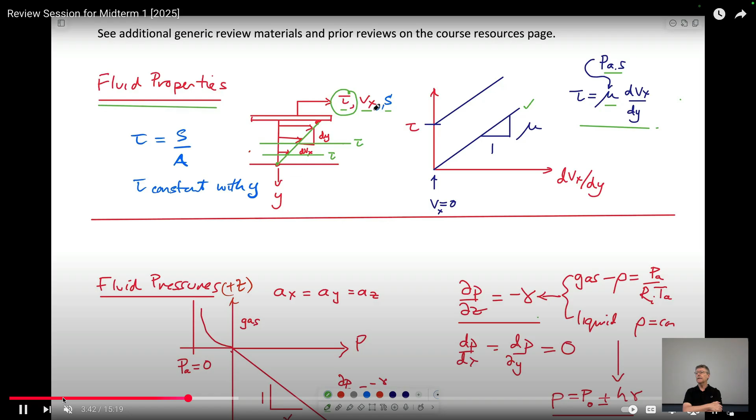So have a look at the stuff. It's not so daunting, it's a chance to show everything you know.

Any other questions? Did anyone get any angst on Sunday morning? No, you're up too late. That's right, that's good. There were night owls up at 2 o'clock in the morning saying, what the hell's this? If we get here earlier, could we start earlier? 7:55, probably.

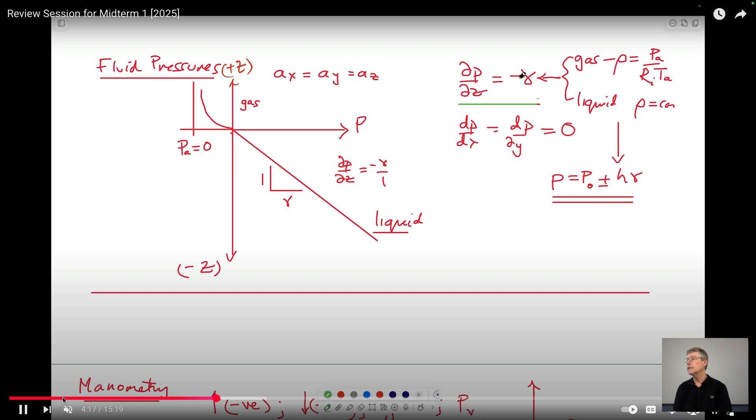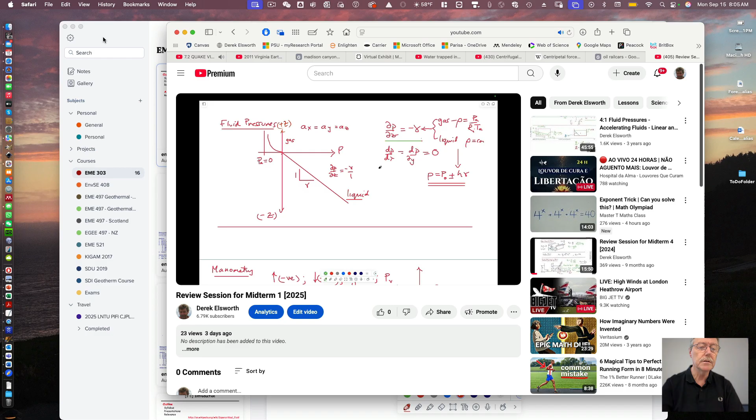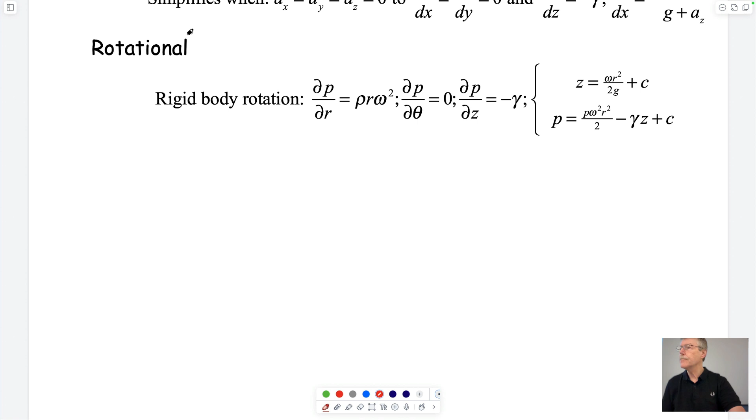So we're talking about this misnomer of accelerating static fluids. If you looked at the material for our Labor Day vacation, the Monday after Labor Day, you'll recognize the following. I'll reiterate just to set the stage. We won't repeat the derivation.

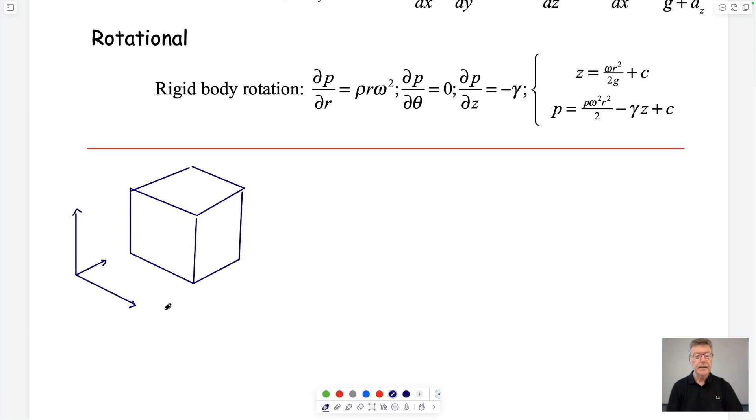We talked about defining the equations of motion, and you'd have seen this little figure before. It all seems a little horrible because it's differential calculus, but actually it's no different to the way we framed it on Friday.

We talk about this right-handed coordinate system, z positive upwards. Lengths of this cube were dx, dz, and dy. We had a weight of this cube equal to mass times gravity, which is the same as volume times density times gravity.

We had pressures acting on the base, and a pressure acting on the top, and that pressure was P plus dP/dz, which we multiplied by dz.

So we resolved this, and we also put on potential accelerations. We could accelerate by some acceleration in the z direction, or by some acceleration in the y direction. Like me scooting across the floor holding one of your beakers of water, it would be exactly that, a bucket accelerating, but one that contains the fluid.

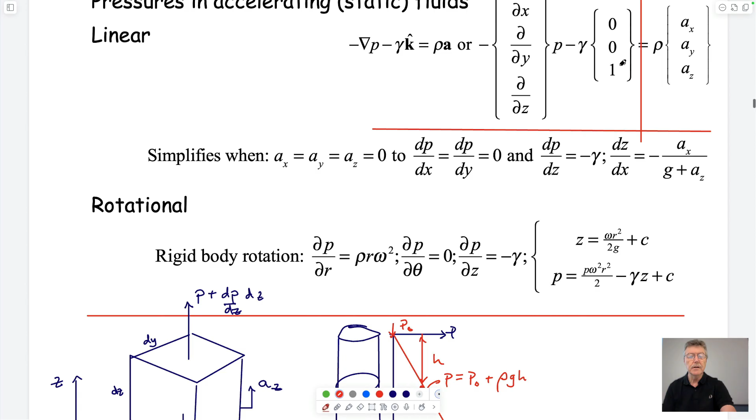There are forces in the x, y, and z directions, which each of these equations represent, which I'll write out in a minute. There's accelerations in each of the x, y, and z directions represented by this. If we divide through by the volume of this thing, equal to dx, dy, dz—the edges of this differential cube—then we can divide both sides by the volume. Mass per unit volume is density, acceleration in x, y, and z is this, and all these other terms are the other forces applied on this differential cube.

And so what we did—don't do this—but we assumed we'd make our life easy in the first 3 weeks by setting all accelerations to 0.

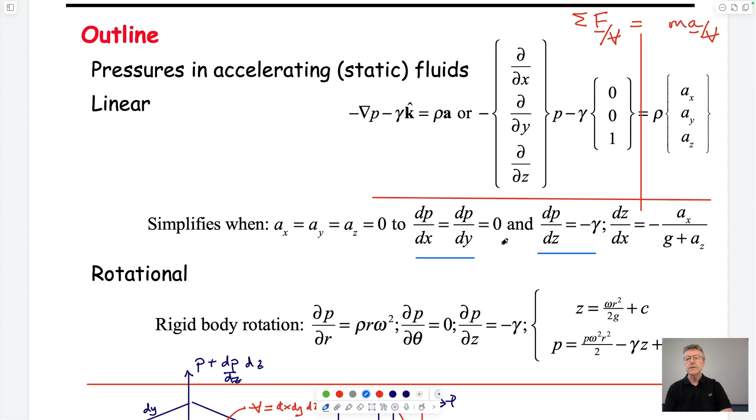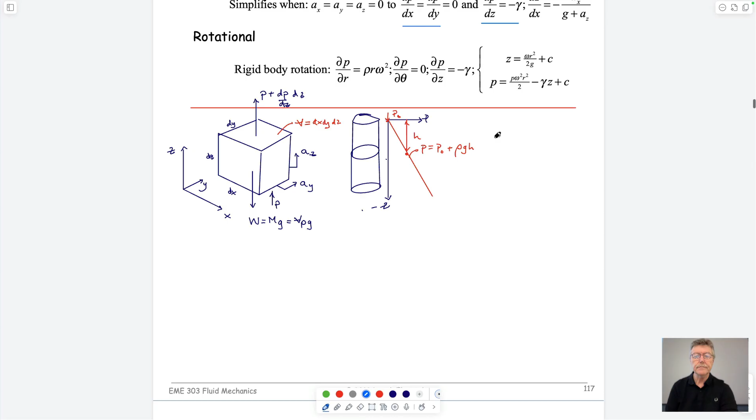If we did that, the equations that we got out of it would be this. Let me write these equations out for us. I'm going to make it small so they can both stay on the page at the same time.

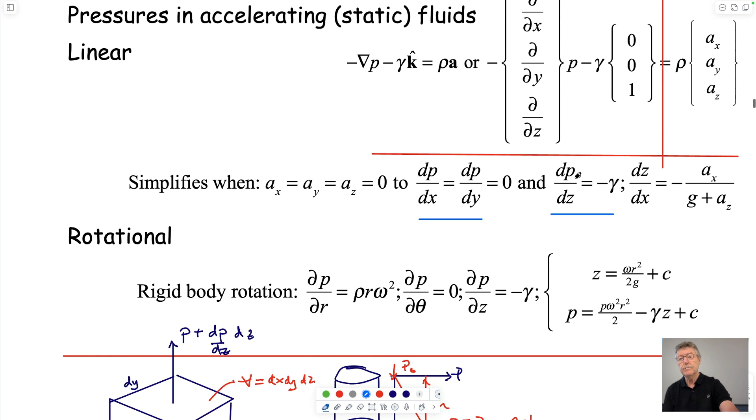So in resolving in the x direction, dp/dx minus gamma times 0, minus 0 times rho g, is equal to rho times acceleration in x.

We have in the y direction dp/dy minus 0 times density of water, not P, density of water times gravity, equals density of the fluid times the acceleration in the y direction.

And we have the rate of change of pressure in the z direction minus one times rho g equals rho times az.

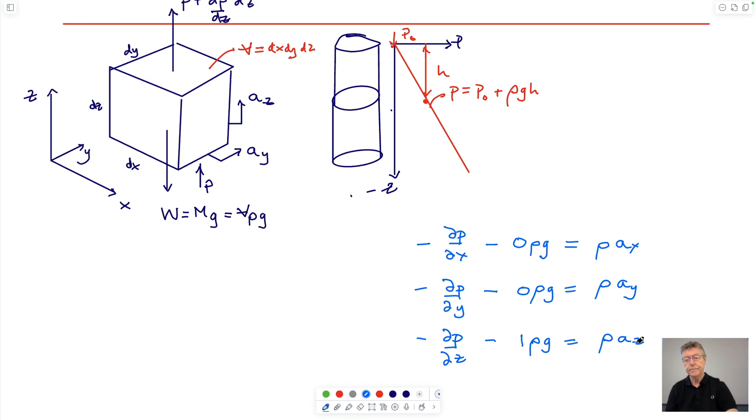So the ones that we use: this is summing forces in the x direction equals 0, summing forces in the y direction equals 0, summing forces in the z direction equals 0. And the expressions we got out of here are that if these are zeros, then we have dp/dx equals 0.

Should be partial: dp/dy equals 0, again should be partial, and dp/dz is equal to minus rho g, equals minus unit weight. And we've used all of these.

These are the ones that say if you go horizontally within a fluid, the pressure doesn't change. We used that for the capillary tube going outside from atmospheric pressure, up inside the capillary tube. You can cut the capillary tube off at the bottom because it has to be the same pressure. So that's where that comes from, and this is where we get this from.

This is just dp/dz equals minus unit weight. We multiply both sides by dz, we integrate, and we end up with this. So that's where we are.

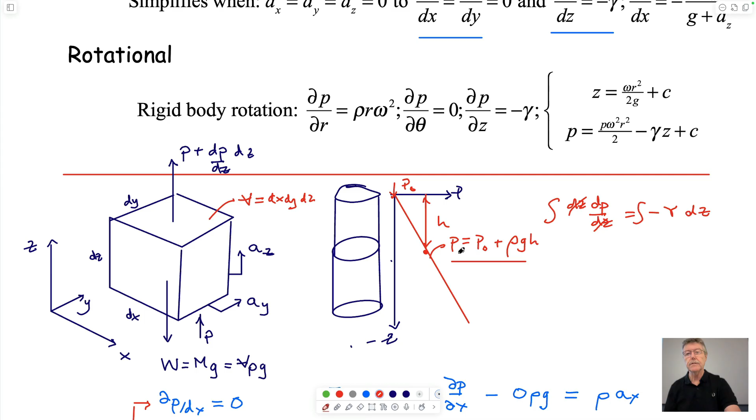So we've seen this before. That's the background of where it comes from - it comes from nothing other than Newton's second law. Now we want to take care of the fact that we allow for these terms to exist.

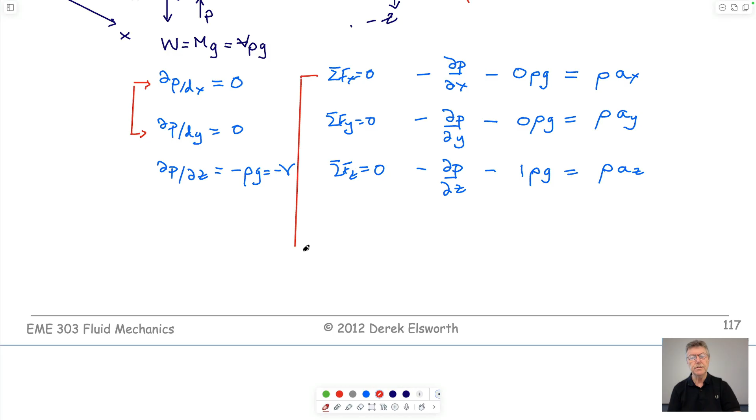If we do that, then we end up with - what would we end up with? I'm running out of space at the end. So if I take this one here - actually I don't want to do that. I want to use the book's example with y, so I'm going to do it to this one.

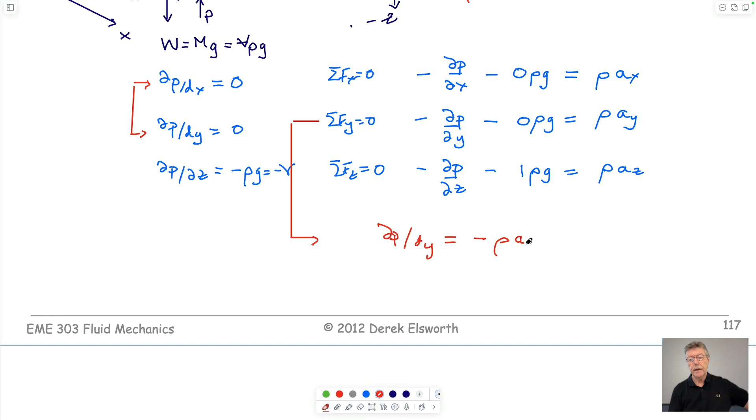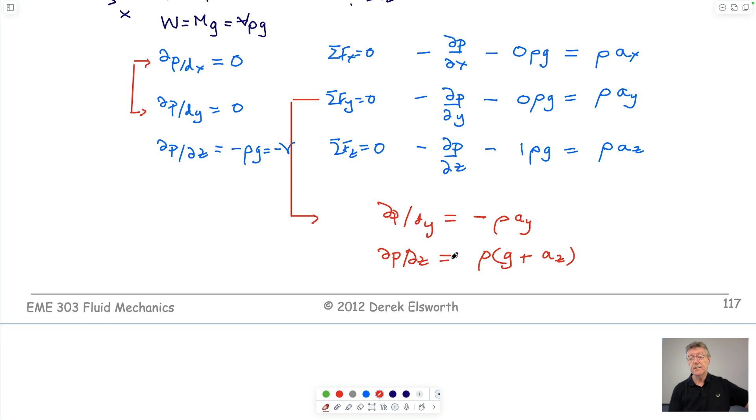We get dp/dy equals minus rho times ay. And if we take the other one, we get dp/dz equals rho g, taken to the other side, and there's a minus - choose one side to go on, and it's this. So those are the two equations that we'd like to mess around with.

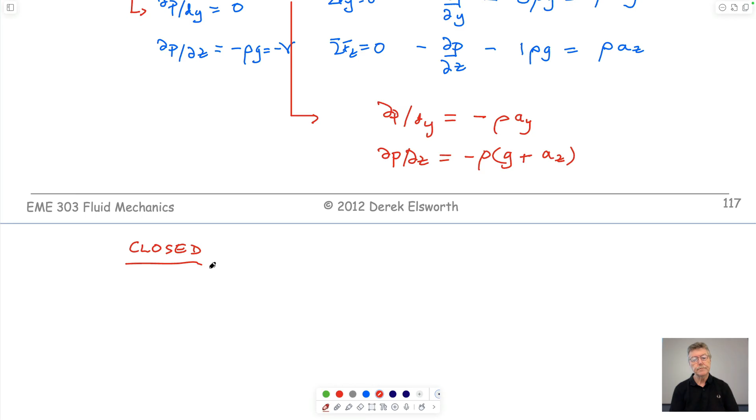And the reason that we'd like to mess around with them is that they say something about what's going to happen within a container. We could think of a closed container - your beaker, or it could be me running across the room with an aquarium full of water.

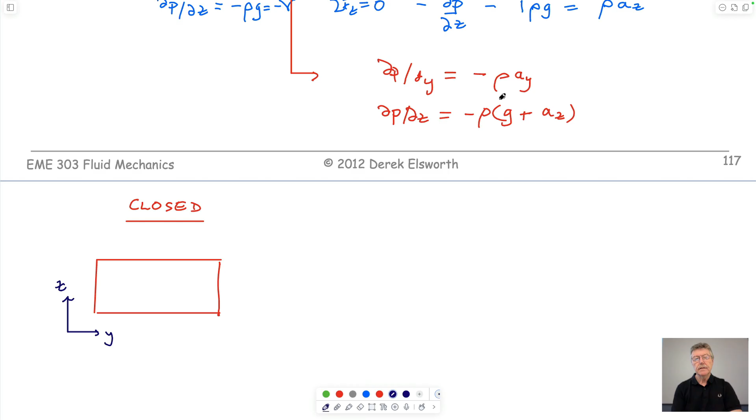And what we're going to do with this aquarium is we're going to decide on some coordinates: Z, and we'll use y rather than x. So if we run across the front of the classroom in the y direction, accelerating in this direction according to that on the screen.

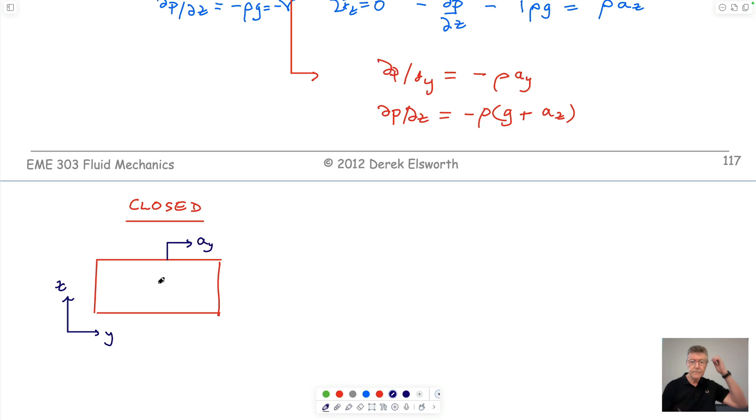We'd expect that the pressure on the bottom, if it's not accelerating, would be - whatever the height of the water times: P is equal to rho g h, where h is the depth downwards. And so the pressure here would be equal to this length, and this length.

But this expression here is saying that the pressure change in the y direction is going to be different from that. It would suggest that if it's accelerating and this is not equal to 0, then the pressure on the base would have a slope to it.

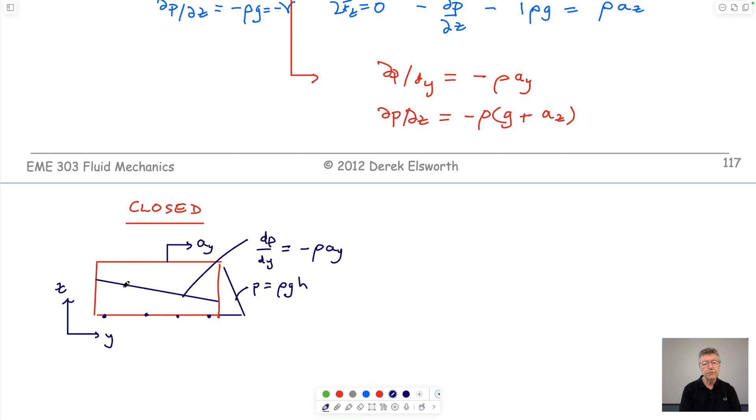And this would be dp/dy equals minus density of water times acceleration in the y direction. So it's negative. And I guess if we wanted to draw this, this would just be dp/dy.

I guess it would be more proper to draw it this way, because dy - yeah. So if this is positive, this is a negative gradient. In this quadrant, this is a positive gradient. And in this quadrant, this is a negative gradient. So these are the geometries.

So just to clarify, the equation on the side that says P equals rho g h - is that pressure equals density times g times h, times gravity times the depth of that point? Okay, so in this particular case at the bottom, this would be h.

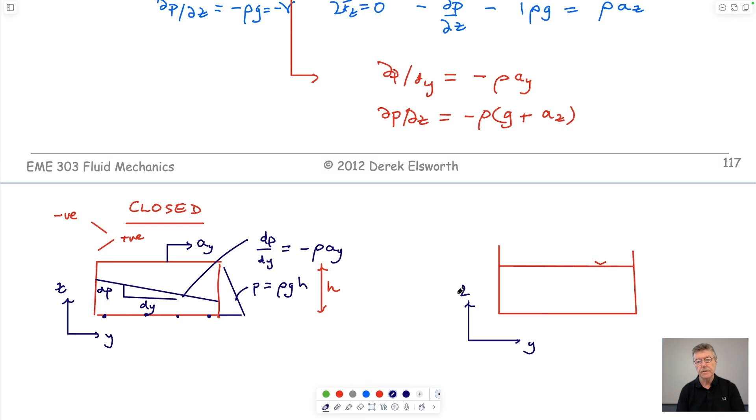So what we think is going to happen, because we've just seen it, is that if we accelerate to one side, then maybe this free surface is going to change. So what we could do is take this relationship.

We could write that the change in pressure that we get, we know that as we go down in the fluid or across in the fluid, there's some pressure change. So we could write the change in pressure as a function of, let me write three of these out with a gap between them, and you'll see where we're going.

What we'd like to do is say that on this surface, the pressure acting is atmospheric, here. On this surface, when it's static, everywhere on this surface is atmospheric. You agree, right? That's what we feel. Likewise, on this surface, once it becomes tilted over, it would still be equal to atmospheric.

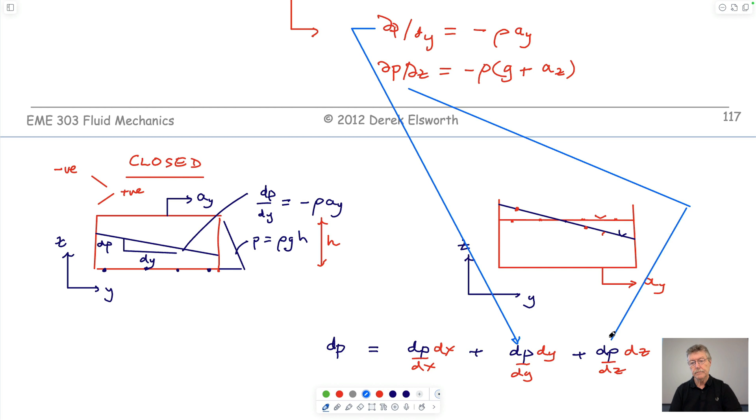That we can substitute. Let's say that going into the page, the planar inclination is horizontal, so dp/dx would be, by definition, 0. There'd be no change. And since the pressure here, and here, and here, and here are the same, we could set those to be equal to 0. So we have this.

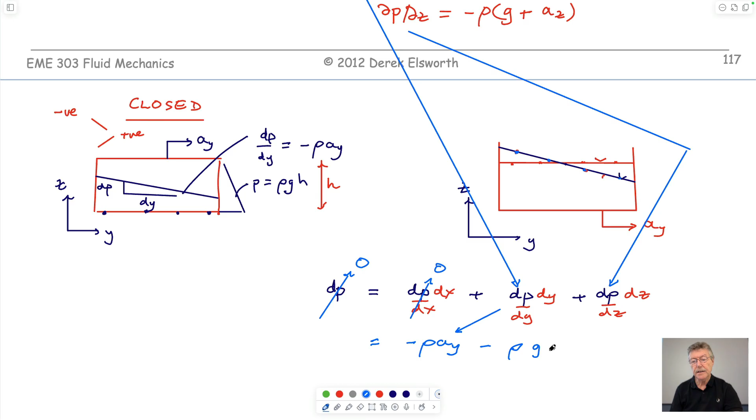And if we substitute these two values, then we'd have minus density times acceleration in the y direction, which is this term, minus density times gravity plus acceleration in the z direction. So all I'm doing is substituting these two values we have here, setting them equal to 0.

I guess there's a dy that I missed out here. Why don't I put it in red? And a dz. Then we should be able to rearrange this, if my math's not horrible, by gathering the terms, dz/dy is equal to minus... so this is just this equation.

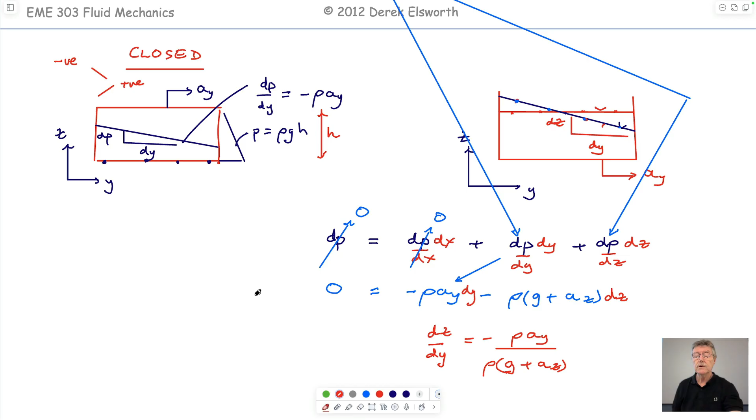So the idea is that now, on this surface here, we have dy, and we have an elevation dz. So it gives us the inclination of that surface. All we've done is use this full expression here, where we now accommodate these terms.

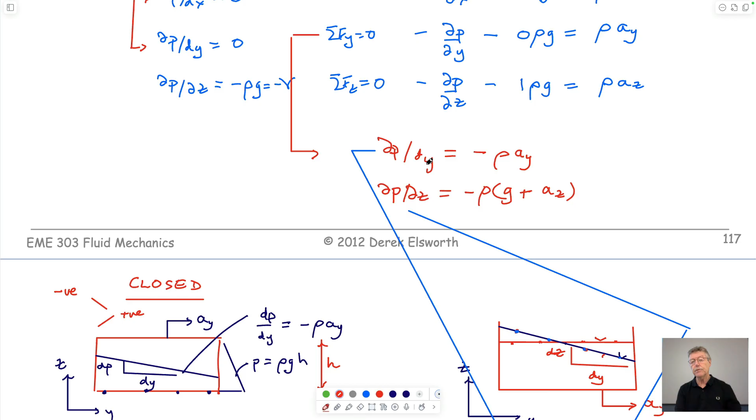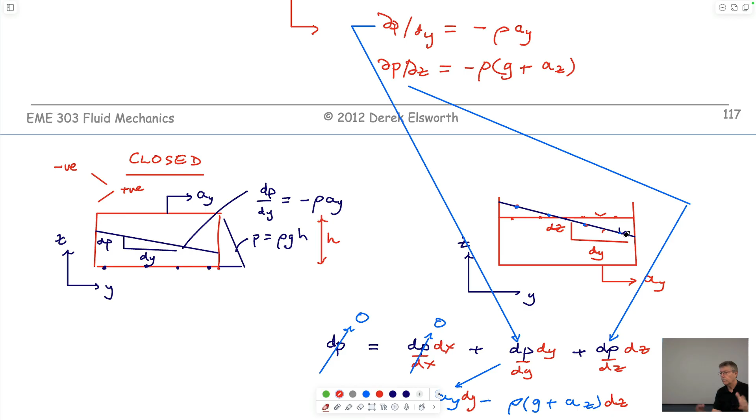If we look at these equations for x, y, and z, and simplify them, we get the pressure change with y, the pressure change with z, which would give us how the pressures change in this closed body. But more interesting for this, we're interested in seeing what happens to the slope of this surface as we accelerate across the room, like with a tank or a bus window that has water between it.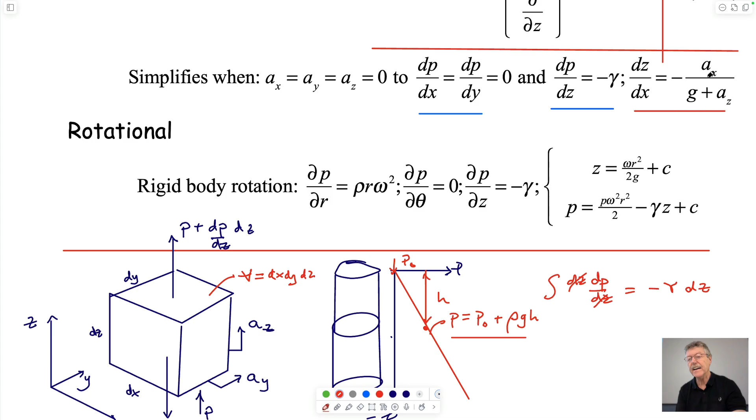And so this is a standard result. It's plotted for you up here in x, but this is just y, so dy, just split them out. What it allows you to do is, if you know from our bus that's going down the road, I don't know what it was, it looked like it was maybe 1 to 4, for the inclination of this.

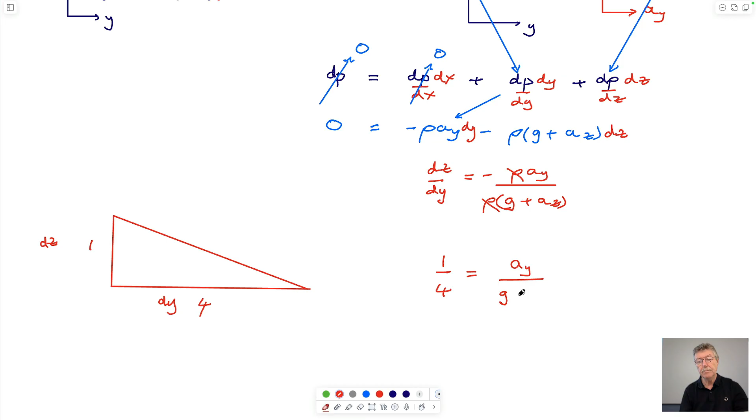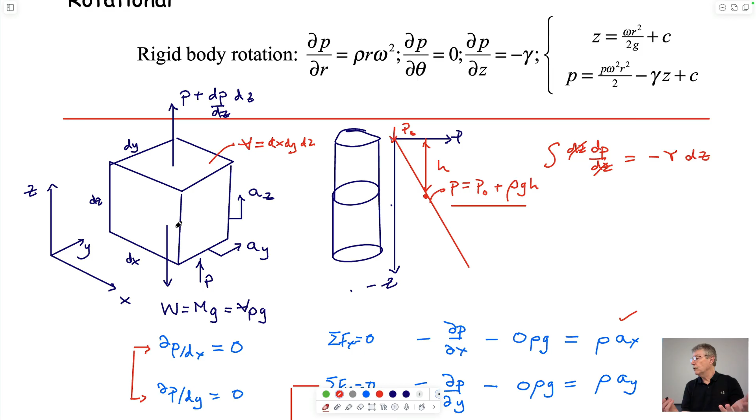Then this is dz, this is dy. So this becomes 1 over 4 equals ay over g plus az. G always acts downwards, as in this expression here, right? Gravity always acts in the negative z direction in our coordinate system.

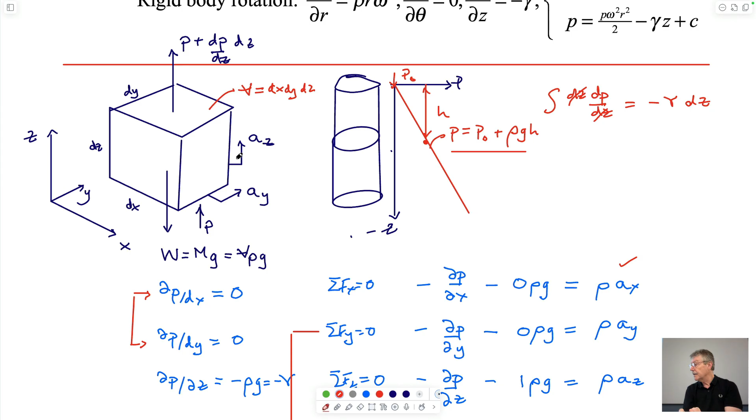But the acceleration that we're adding to this, so az, acceleration in z, would be going up in an elevator or going down in an elevator, on top of gravity, which is always acting. In this particular case, if the bus is running along the road horizontally, then by definition, the acceleration in the z direction is what? 0, right? Just going horizontally. So this is 0.

And as a result of this, the acceleration in the y direction would equal 9.81 meters a second squared over 4, just this term here. So you have an accelerometer in your bus. Yes. Where did the negative sign go from that top equation?

Yeah, the negative sign is gone because, to go from here to here, you have to go negative y, positive z.

So this is in this coordinate system—positive y and positive z. This is a positive gradient, this is a negative gradient. That's exactly it, good question. So you can tell exactly what the bus is doing that we looked at just by looking at that, right? That might be a good thing to understand.

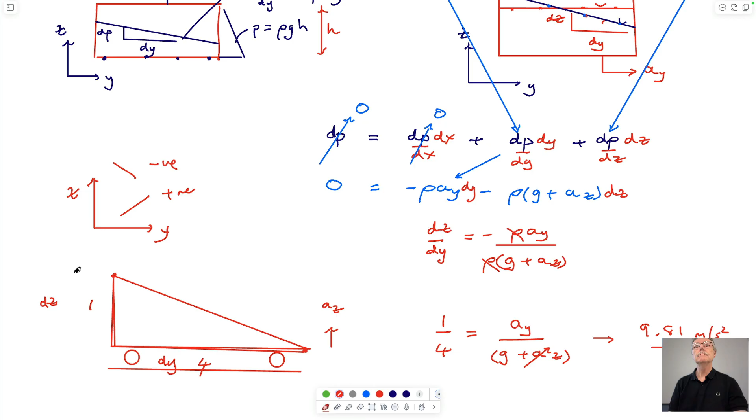Questions? Okay, all right. So the other thing we can do, which gets a bit more complicated, is we can also look at rotating fluids.

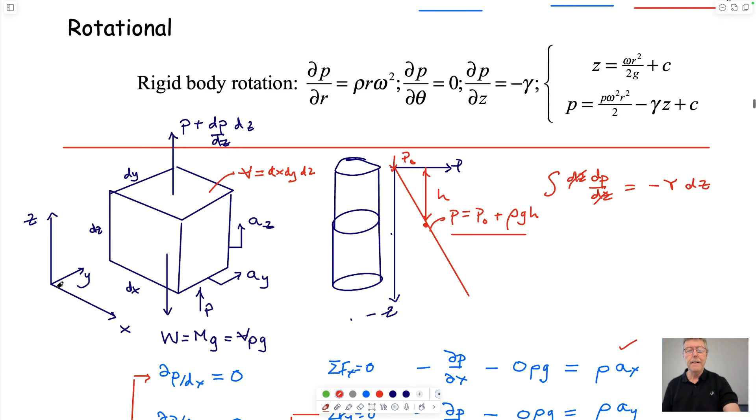So maybe I'll resort to my notes. This is the explanation of all this. Here's the expression, no examples. I guess a couple of other things we could talk about which are worthwhile talking about, and that is if we have this open tank—so this is your bottle that you have in your hand in the elevator.

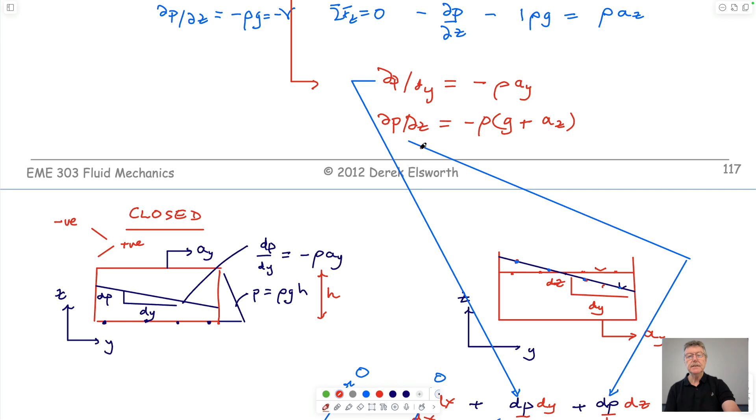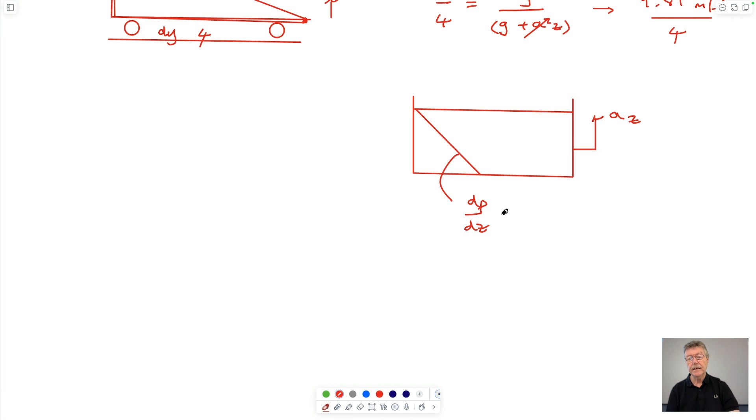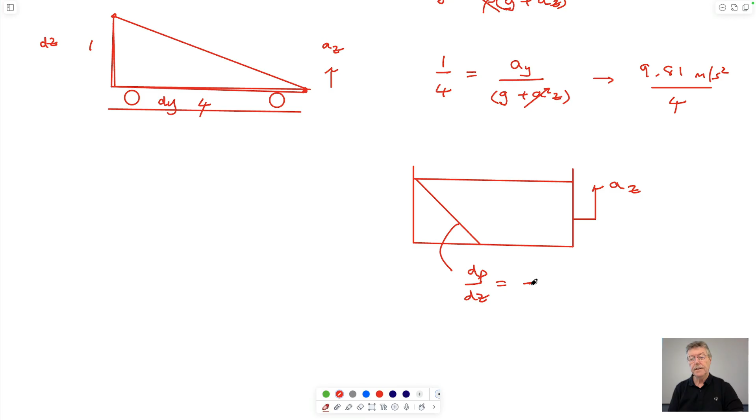dP/dz. So we know what happens if you had your aquarium in the elevator and you decide to go up at some acceleration az. Then you'd expect that the pressure distribution with depth, dP/dz, in your container as you're moving upwards would be exactly this magnitude here: minus rho times g plus az.

G always acts downwards, and so is always positive—this is always 9.81. But az has direction. Acceleration in the z direction has direction as well as magnitude. Accelerate upwards, this would be positive because it's in the direction of the z coordinate system, the positive direction. And if it's downwards, it would be negative.

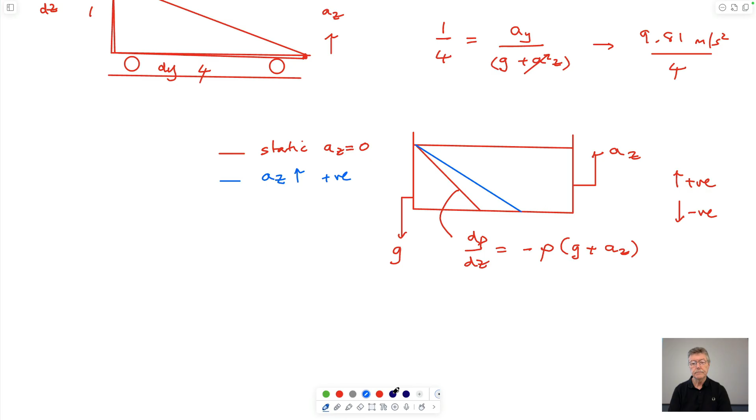So in other words, if you're going upwards—if this in a static tank is this, so if this is static—if this is az upwards, which is positive... and if this is accelerating downwards, just according to this equation here, right?

And so it tells you what you kind of know. You're holding something in your hand—if you're holding a weight, a dumbbell, and the elevator accelerates, not just constant velocity, the acceleration phase feels heavier. The representation of that here is that the addition of an extra acceleration in addition to gravity makes it feel heavier, so you have to apply more force to keep it up. If you're going down, it feels lighter. And this equation tells you that if you're accelerating down at 9.81 meters per second squared, exactly countering gravity, then the magnitude of this distribution would be zero—you'd be weightless.

It'd be the same as going over in the vomit comet, as NASA calls it—this plane that does a parabolic arc so you can be weightless, floating around for a few seconds before, I suppose, you hit the deck or hit the ceiling. I'm not sure which, but I'm sure they do it to moderate that.

Just to confirm, does the 've' you wrote next to the az represent the gradient? Say again, what? The 've', every... this? Yes. 've', positive—like I explained before, right? Positive is my shorthand. Okay, yeah, so I don't mean to confuse you or berate you. I know that in the past people went through ten classes and said 'what is this VE?' And then it's easy for me to tell you once someone asks. Yeah, so it's just positive.

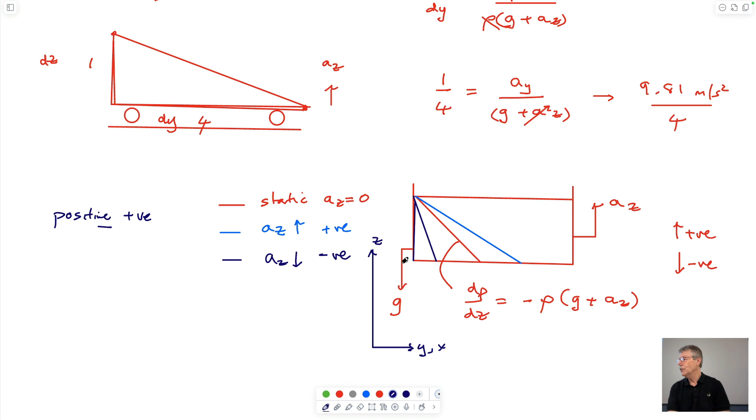Okay, so in other words, you're weightless. Your blood in your body would not congregate in your feet—it would just be free-flowing. And I guess if you're weightless in space, there's all kinds of physiological issues about pumping. I guess you're kind of self-contained, so your heart would work just as well. But I guess there's lots of physiological things with no stress on exercising muscles and atrophying of muscles, etc.

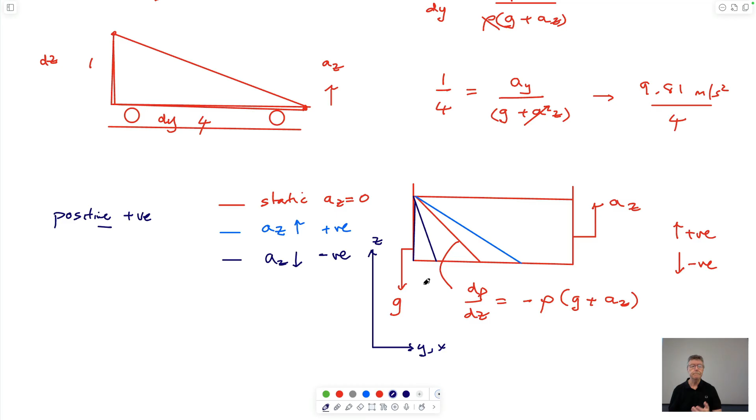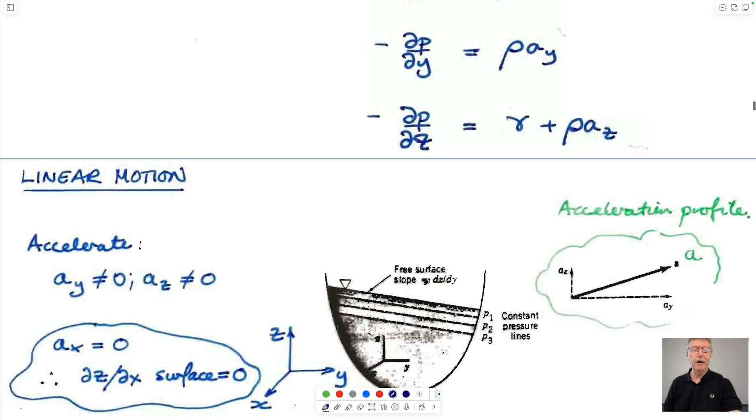So linear accelerations are definitely on the test, and it definitely uses a prior question. I'm not trying to be smart, I'm trying to actually be helpful. I want you to do well. Nothing worse than coming to class on the Monday after midterms and looking at glum faces. I'd much rather look at happy faces who've done so well that they're ecstatic, who don't want to come to class because they're sleeping in and taking a day off because they've been working so hard. So I don't mean to be glib and flip. So this is all documented here.

The other thing that we could think about, and maybe talk in broader terms, which isn't on the test, as you'll see as you look through the review notes.

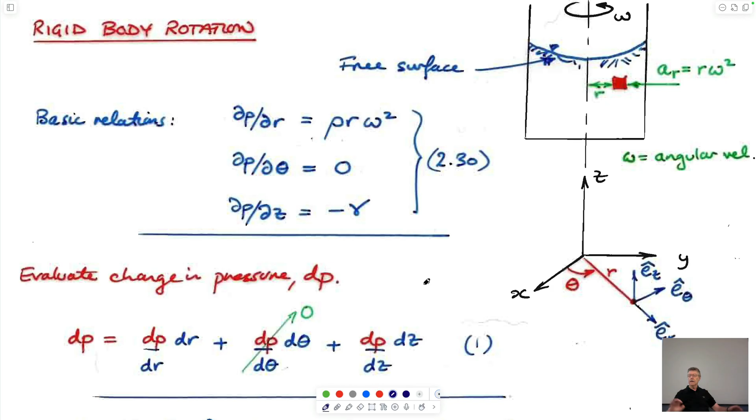The other oxymoronic case is of accelerating fluids, rotationally accelerating. This is a bit more esoteric, but the idea is this: you go to the fun fair, you go on the wall of death where you get spun around and they drop the floor from underneath you, and you're stuck centripetally on this wall that's going around. That's really not so different from taking a fluid and rotating a can of beer around its central axis at some rotational speed.

So the other twist for this is that if it's going at a single rotational speed, say 1 revolution per second, then that is an angular acceleration, because acceleration is both direction and magnitude, as we just talked about. We're interested in the magnitude of it changing as you go across the room, but not the direction. In rotational acceleration, it's flipped.

So the rotation speed of a particle that would be on the lip of the can, going around and round, would be 1 meter a second or 1 revolution per second, depending on how you're measuring it. But because at one location the direction of this motion is parallel to the rim of the can, to get to the next location it's changing direction. So it's going at the same speed, the velocity is not the same, but the speed is the same, while the direction of that motion is changing as it goes around the can. If I'm the can, it's changing direction because it's tracking with the machine.

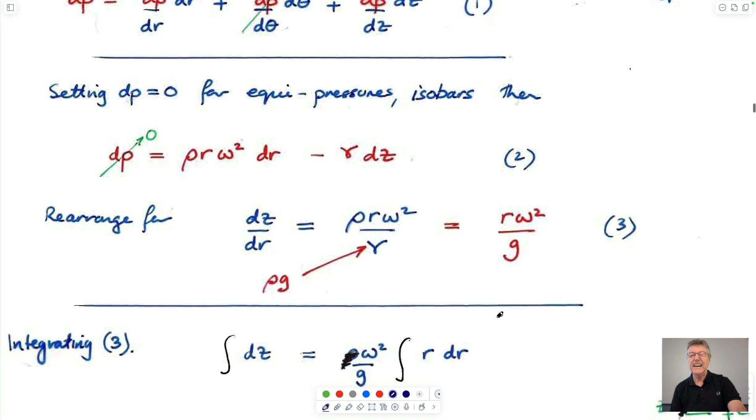So the idea is we can do exactly the same thing as before. We can take these equations on trust. It's the same as taking a piece of string, putting a weight on it, and spinning it around your head. The force you have to apply to keep it pulled in is the same as Newton's second law, but in angular coordinates. And we can do exactly the same as we did before: we can take these expressions for dp/dr, dp/dtheta, and dp/dz.

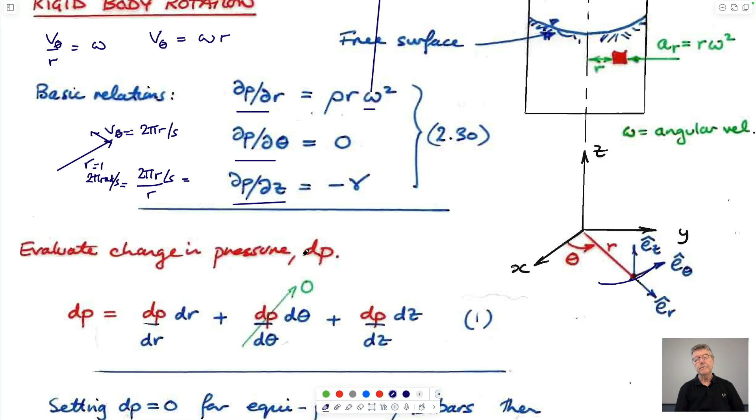And we can try to figure out what the shape of this surface is that builds up as you start spinning it. You notice that this one just says the pressure changes with depth according to the unit weight. So for instance, if the height of this surface at the edge of this container went up, then the pressure acting here would just be equal to P = rho*g*H, and H would just be the height of this thing here.

That's what this is saying. It's no different from being in a static fluid. It happens to be flung around here, but it's no different in that the pressure here is exactly the same as the height of water above it. It would be the same at this point — the height of water above it.

This says that as you go around, theta being this coordinate system, the pressure change as you go around at a particular radius doesn't change anywhere in the fluid. So if you go around at this depth, come across here, and keep going around, all it's saying is that the pressure as you go in this circuit remains the same. It kind of makes sense, because if you think about the location of this surface, if you drew a contour around the inside of this can, it can't have a discontinuity where it ends up higher at some location and then has to drop down.

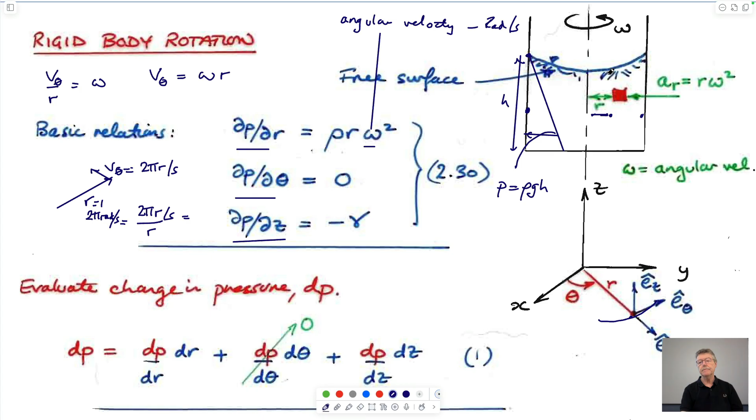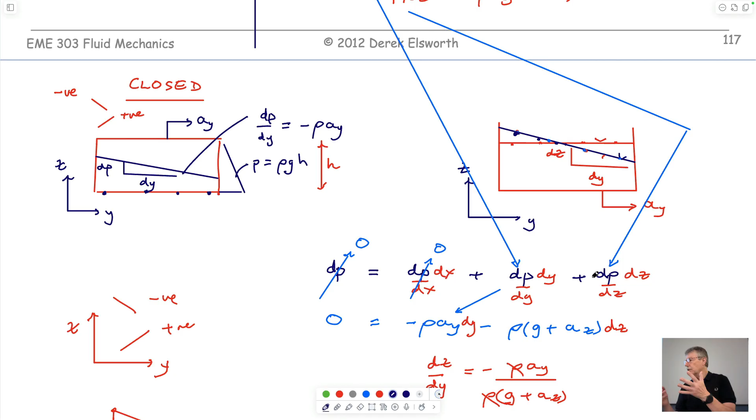And this is the one that means it gets flung out to the side and causes this distribution of elevation. So not to belabor the derivation, let's just think we're doing it as before. Remember what we said: if we have a surface, which now is a curved surface, we can write that the pressure change across this is equal to the pressure change in each of the three coordinate systems, and then we can multiply those by 1 individually.

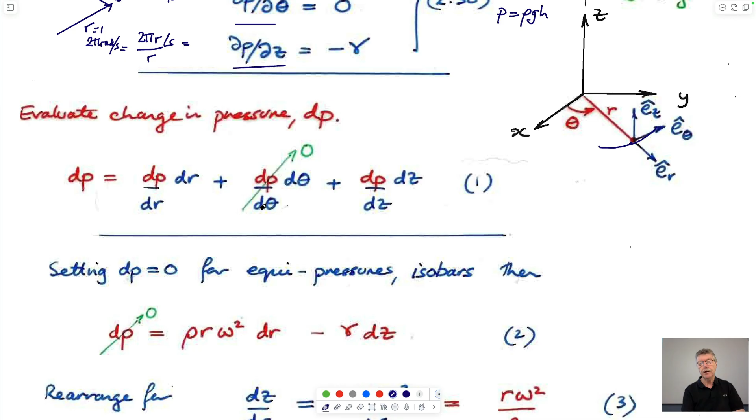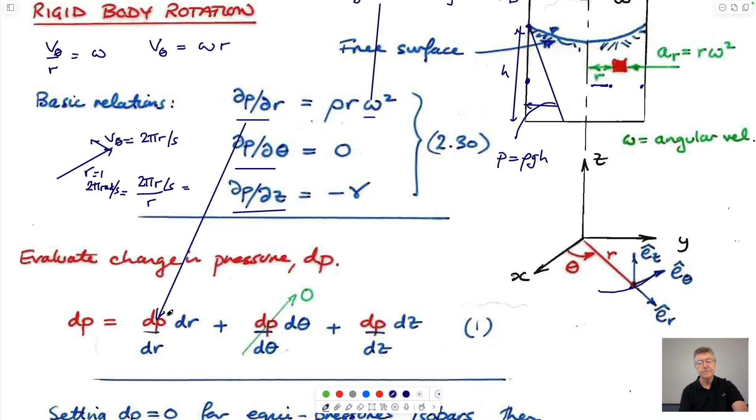We do that exactly again. Pressure multiplied by 1, pressure multiplied by 1, pressure multiplied by 1. Throw this one away. This is the only interesting one that we have here, which we would substitute down here. And if we do that, then we get a standard result.

And the standard result is this, that the elevation of this surface... well, that's not bad, is dr dz. So we're interested to know what this curvature looks like, and we have it dz dr, I guess. So it's the opposite of those. So we have an ability to get this. We end up with this equation. So this is a standard result.

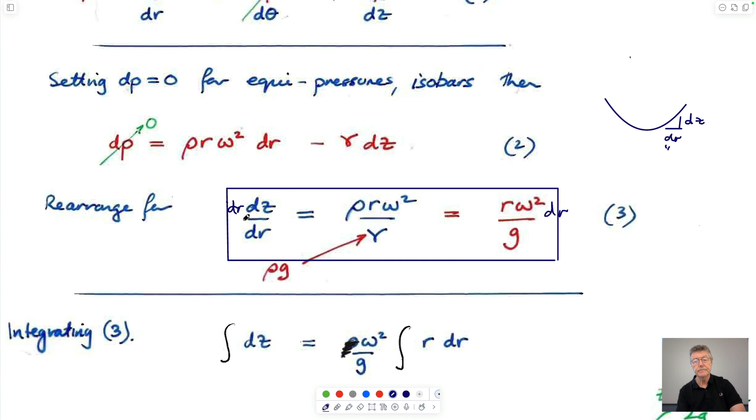If we want to integrate it, we can do just as we did before. So we could divide it up to get dz and dr on the same side, just by dr, and integrate it. And you get this expression here. And again, you end up with a standard result.

And this standard result is that the elevation changes as a function of the rotational velocity squared, gravity, and the distance from the rotation point also squared, plus some constant that we're left with.

And so if we wanted to, we could solve for exactly where we are on this by writing this expression at some location. So for instance, if we wanted to calculate what the height was at z1, and we knew that at z0 was h, then we could write z0. We know the rotation speed, we know gravity, we know that the radius is 0.

And so we know that the value of z0, let's say it's 1 meter. We'd know that the value of z0 would be 1 meter. So we'd know that the constant equals 1 meter. Has to be meters to be dimensionally consistent.

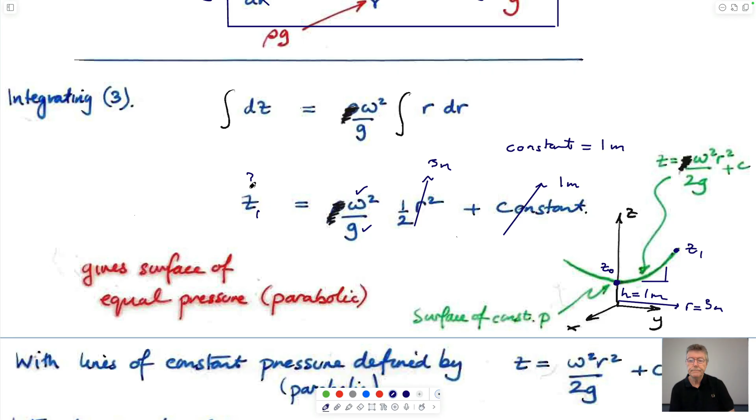We know that this constant is equal to 1 meter. And since we know this and know this, we can calculate what this is. That's it. And you can solve some problems doing that, which you don't need to because you don't have a question on it on your test.

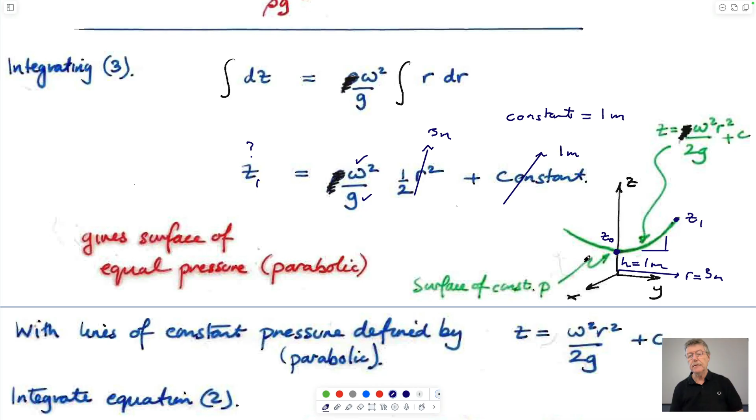Okay, so same theme though, same thing. Trying to find out the curvature of the surface. It doesn't end up being a linear one, so we have to deal with it by solving for this constant and then going for it. And I guess the other thing that I didn't mention is...

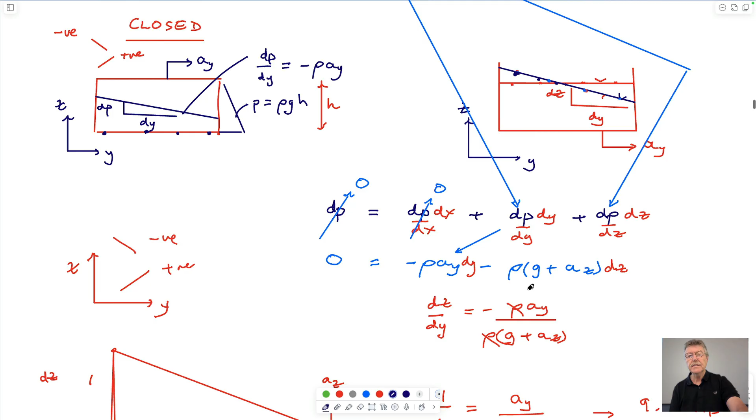When this occurs, the other concept you have to know is that conservation of mass means that this has to be the midpoint, right, of this tank. Because half of it's going down by this amount and the other half's going up by this amount. So the slope and the absolute height of this location have to be around this fulcrum, if you like.

And I guess we'd also know that if you had to calculate what the pressure was at the back, this would just be equal to P equals rho g h, acting on the back. There have been questions asking what's the net resultant force acting on the back in the past. So, don't know.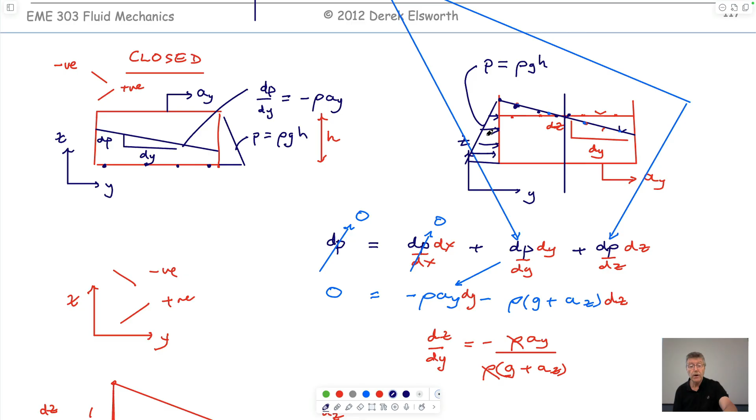All right, so we talked about these equations today. It's not a waste, we will rely on these now. So we finished talking about fluid statics, the fact that we can get pressure at a point as a result of knowing the fluids above it. We can also get the pressures by looking at the accelerations. Now we'll talk about Bernoulli's equation, where we have fluid dynamics, moving fluids, and we can actually use these expressions to be able to look at that.